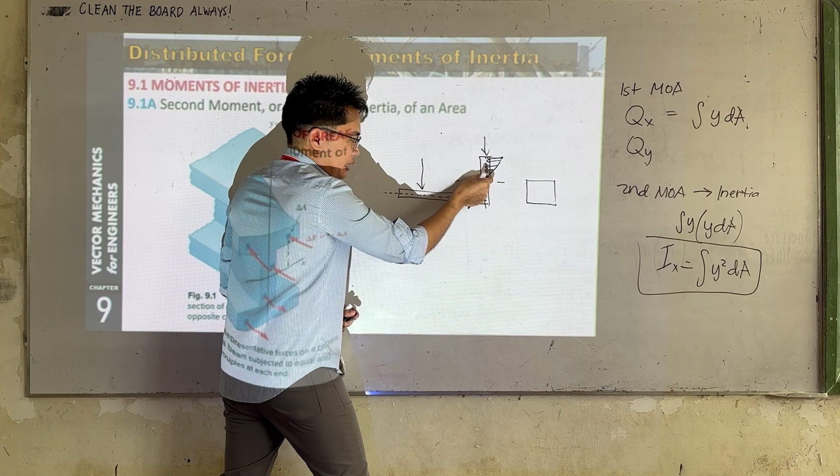Kung titingnan mo dito, kung nakapatumba to, paano natin i-drawing yung compression? Sobrang liit lang, compare dito. Ayan, ito yung amount ng compression na mararamdaman niya.

So the further away our material from the neutral axis, mas better siya. Therefore, kung nakapatayo to, mas better yung design na to, kasi mas nalalakihan pa niya yung amount ng compression na mariresist niya, compare dito, dito ang liit lang.

Kaya sa construction, before, it's a breakthrough nang nalaman nila yung mga I-beams natin. Mapapansin nyo na yung mga metals na ginagamit natin sa construction, in a shape of rectangle ba? Hindi di ba? Kung mapapansin nyo, yung cross-sectional area ng beam natin is in ganitong shape, para siyang tatlong plate - isang plate sa baba, isang plate sa taas, and then may plate sa gitna na nakatayo.

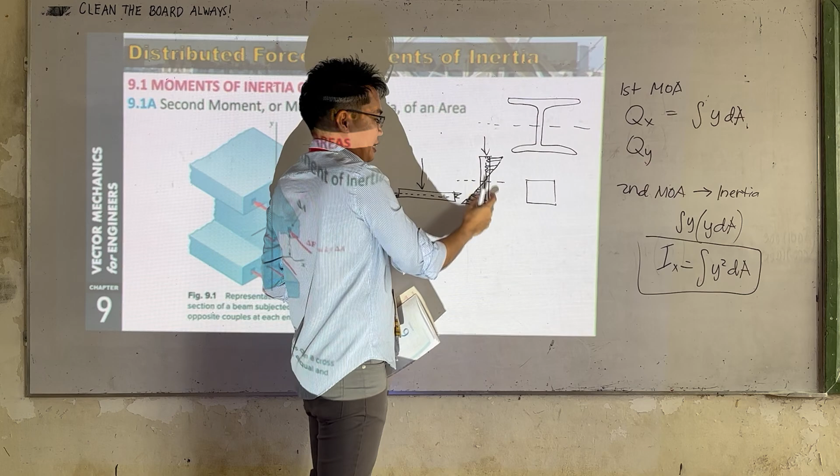Pag ganito, kasi ini-increase niya yung amount ng area that is far from our neutral axis. And by that, increasing the amount of area that is far from neutral axis, ini-increase mo yung strength ng material. Na-discuss din natin, for example, ito.

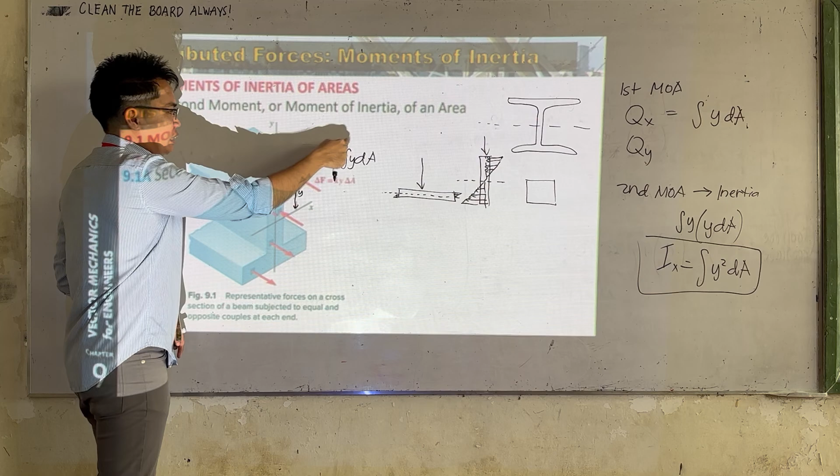Sa pagkuha ng Q natin dito, sabihin natin QX, that is integral of y dA. Yung y natin is just the distance from the point na in-evaluate natin. Ayan, this is our dA, and this is our y. I-multiply mo yung dalawa, i-integrate mo, yan na yung QX natin.

Now kung lalagyan ko to ng squared, i-multiply ko pa to ng another y, magiging Ix na siya. And then kung gusto kong hanapin yung inertia ng whole system ko, i-sum up ko lang lahat ng product ng y squared at saka dA natin.

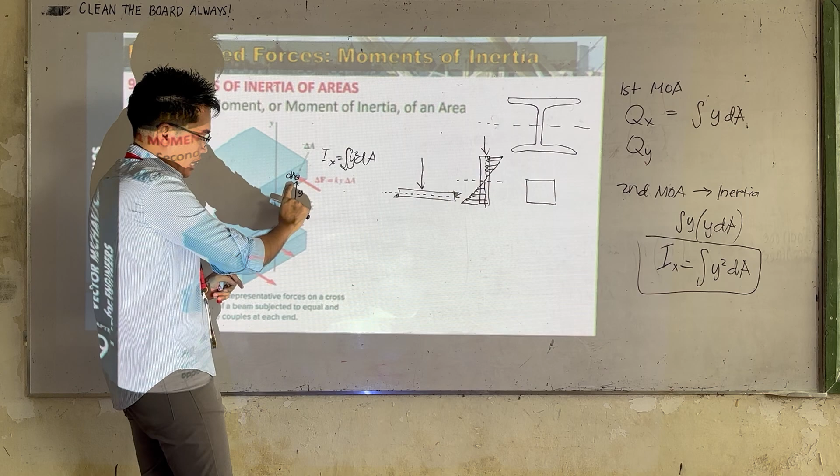So ayan lang, increasing this one, makikita nyo that y is directly proportional to our moment of inertia. Therefore, increasing this y, increasing the distance away from our neutral axis, would increase our second moment of area or the inertia. Makikita nyo from the formula, they are directly proportional - increasing the distance would increase the amount of inertia.

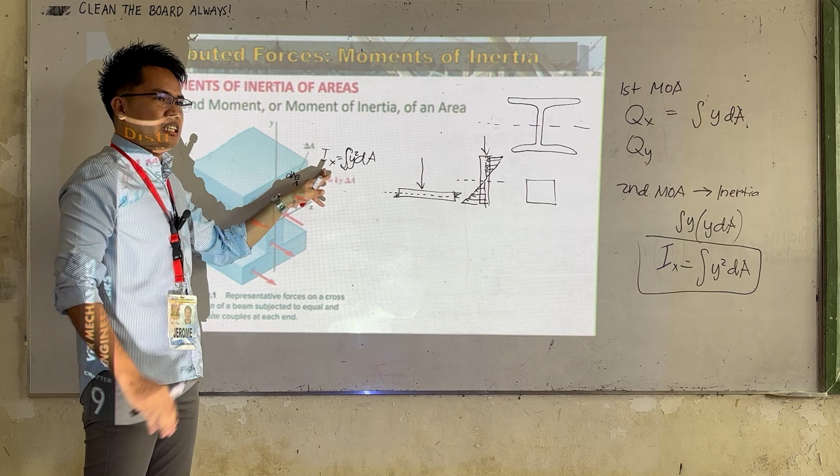Okay, but here, yung inertia natin ay hindi siya independent or hindi siya material property. Sabihin natin, not all the time na yung inertia natin is the same kung the same yung structure at saka yung material property natin. So yung inertia natin is nababago-bago.

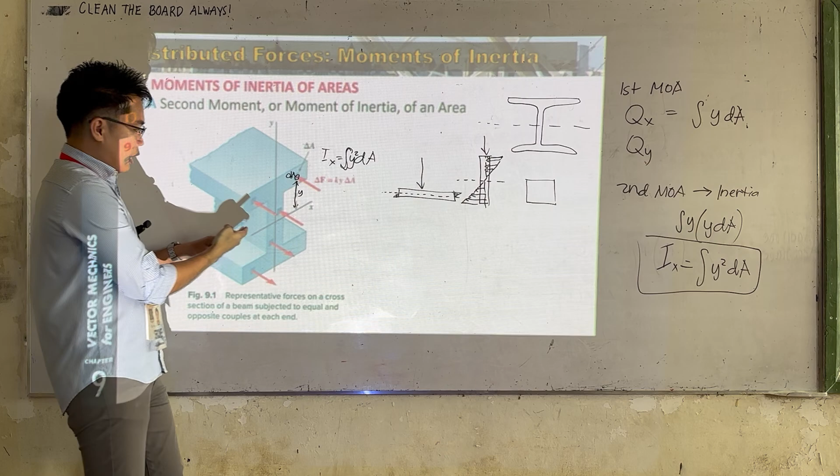Depende kung ano yung axis na ginagamit mo. Kung yung axis mo na ginamit is itong neutral axis, yung distance mo from here to here is y. Now what if yung gamitin kong axis is dito sa bottom? Ang distance from here papunta sa bottom ay mas malaki. So hindi all the time na kahit same yung cross-sectional area natin, and same yung material natin, same na rin yung inertia. Depende pa rin sa axis na gagamitin natin.

Yung mga inertia natin, may integration man to, kaya we need to evaluate this one. Pero sa book natin, available na yung mga na-integrate na mga equation para sa mga regular na mga shapes.

For example, we have circle, we have triangle, or we have parabola. Ito sila ay na-integrate na, pero yung natin, yung neutral axis na pinili natin is at its centroid. So no need na i-evaluate natin to na expression. Kaya available na yung mga formula sa mga regular shape polygons.

All we need to do is to memorize. Pero kung hindi mo to memorize, mag-evaluate ka talaga. Pero sa exam natin, i-allow ko na magdala kayo ng index, para hindi na mag-memorize. And then ano pang meron dito?

Na sir, what if sir yung hinahanap sa exam is yung inertia natin, gusto kong kunin na inertia is yung ginamit kong axis is nandito sa baba. So ano yung gagawin ko?

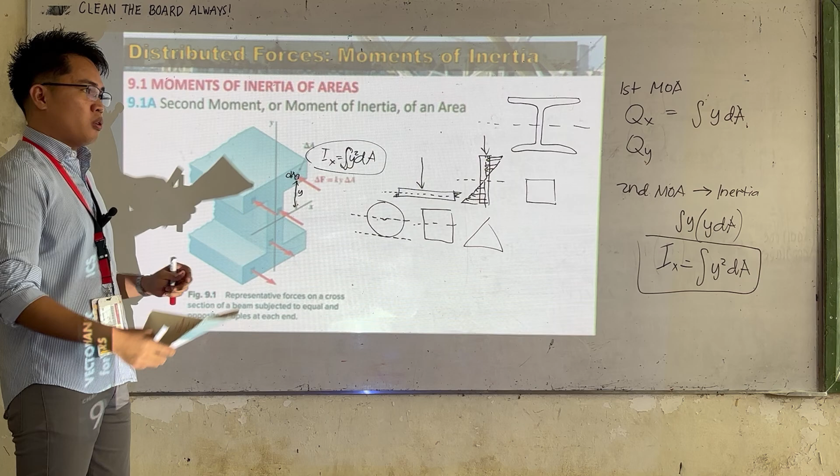Yung available lang sa book or available lang sa index ko is itong nasa centroid ko. So ano yung gagawin ko? Dyan napapasok si parallel axis theorem.

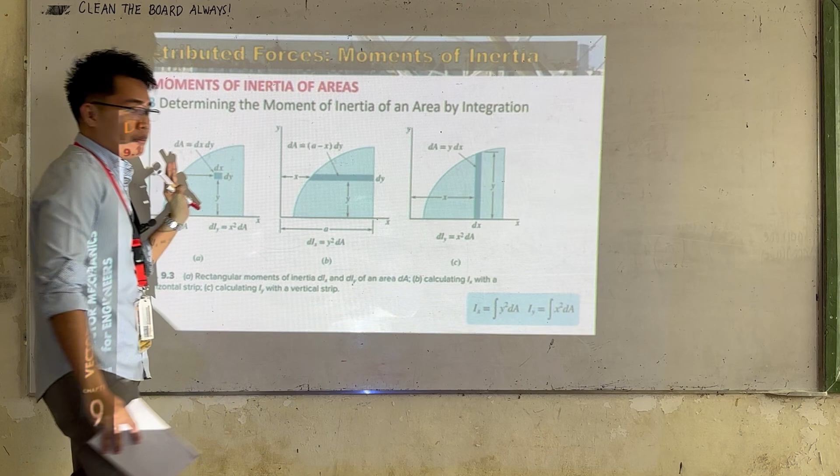Familiar kayo nito? Na-discuss na natin to last time sa chapter 5. But for this one, yung equation natin is YDA pa, wala pang squared. So this time, same pa rin yung gagawin natin, same expression, same figure, pero yung y natin dito meron nang squared. Yung way ng pag-solve natin sa pag-evaluate ng area, nahahanap natin ng area, same pa rin sa chapter 5 natin, sa centroid na topic, sa integration. Pero dito, yung expression lang natin may squared. Parang walang kaibahan, nilagyan lang natin ng squared dito.

So basically, this topic is parang repeated lang. Nilagyan lang natin ng squared dito. Yung additional lang dito is yung pag-integrate natin na may squared. Parang hindi to bago.

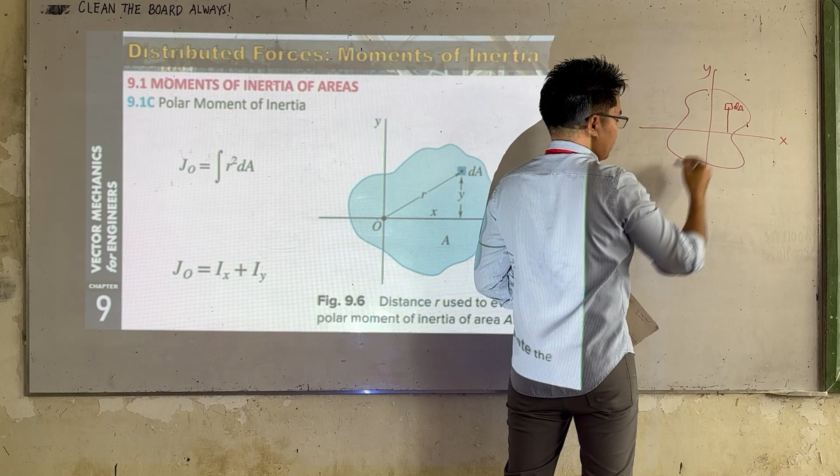If we have an expression, for example, meron tayong area dito, at yung nakuha mo dito ng elemental area dA. Meron tayong x-axis at saka y-axis natin. In order na makuha natin yung Ix, ix means yung y natin, ang moment arm, dito naka-rotate. So ayan lang, ix, therefore, yung ginamit mong moment arm is y.

So this is integral of y squared dA. Kung dito naman sa x yung ginamit mong moment arm, yung makukuha mo si iy, integral of x squared dA. Dito mo makikita, kung yung material mo is mas rigid siya, kung mas malaki yung second moment of area natin or inertia.

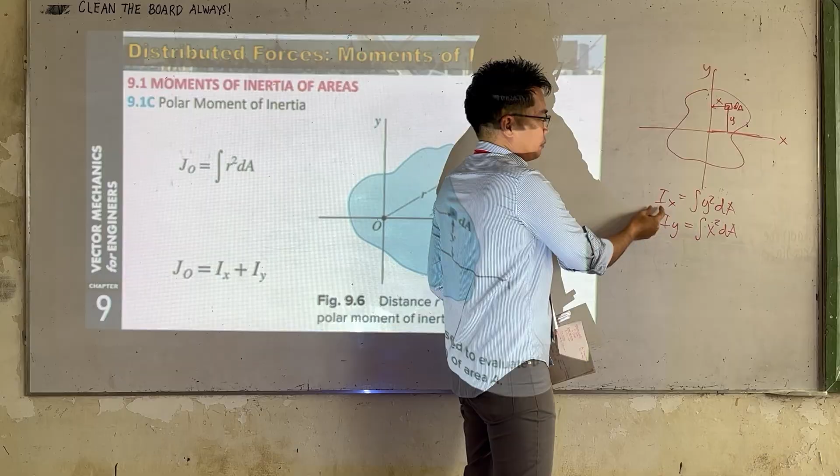So evaluate lang natin to. Actually, dito sa 161, yung gagawin lang natin dito is isolve natin si I. At yung application ng inertia natin, dito na sa ENS 164. Saan ba natin ma-apply si I natin?

So si I is pwede nating i-apply sa tinatawag nating deflection of beams. Di ba sabi natin kanina na mas malaki yung I, ibig sabihin mas resistant siya from bending. So sa ENS 164, yung formula ng deflection natin, we have d squared v over dx squared is equal to m over EI.

Yan yung deflection natin, the amount of moment over the E times the I. Yung I natin is yung inertia, while yung E natin is yung modulus of elasticity natin. Di ba magagamit natin yung I dito? So yung I, mas malaki to, makikita mo na they are inversely proportional sa deflection natin.

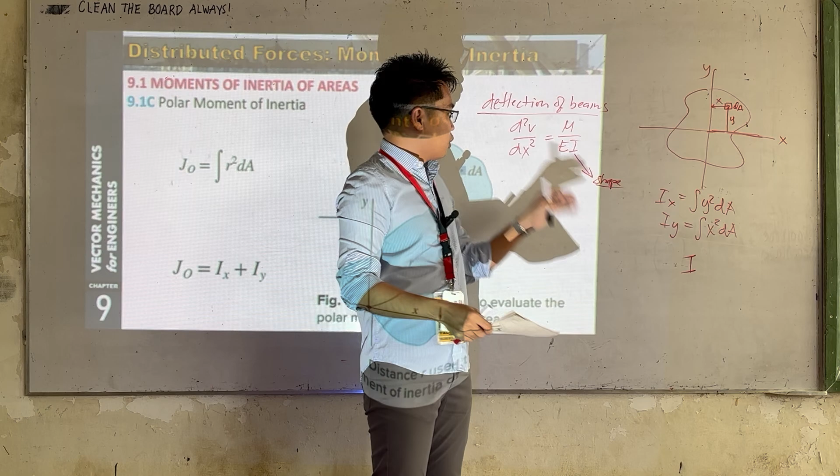Yung I natin is for the shape ng material. Kung pipili ka ng material mo, dalawa yung kailangan i-consider: one is yung material property, and the second is yung shape ng material mo. Kasi yung shape ng material mo nakaganito, mas mabebend siya. So in order na malaman mo yung deflection niya, meron tayong dalawang kailangan. Yung I dito is for the shape, at yung E natin dito, the modulus of elasticity, dito makikita kung ano yung ginamit mong material.

Steel ba? Aluminum ba? So ayan lang, dalawa yung kailangan: klase ng material and then sa shape ng material.

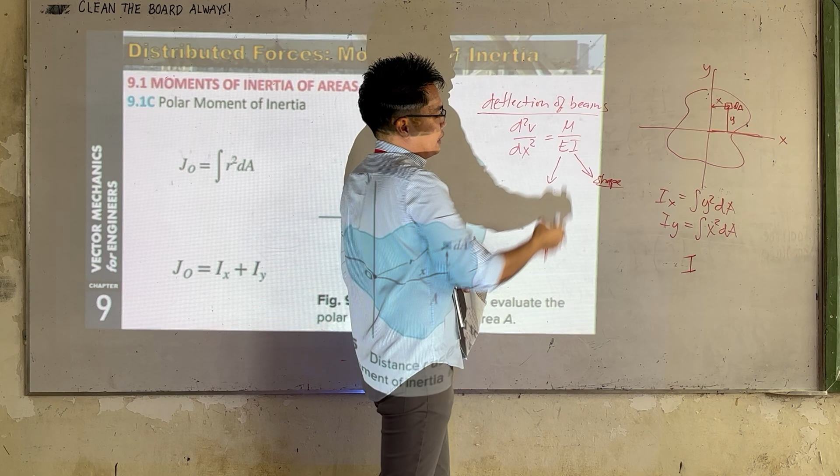Okay, another application nito is yung critical buckling. Dito din, ENS 164 pa rin to. Formula nito is PCR is equal to pi EI over L squared. Makikita niyo na yung I natin dito ay kailangan pa rin hanapin in order na masolve natin yung critical buckling natin, ang load for critical buckling.

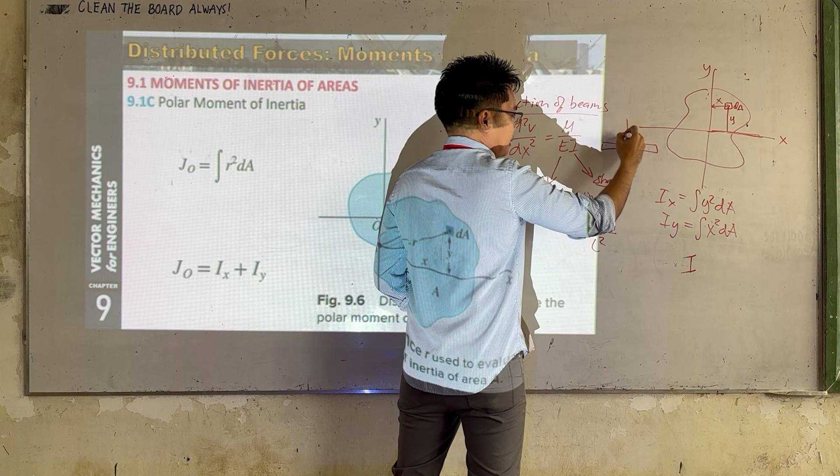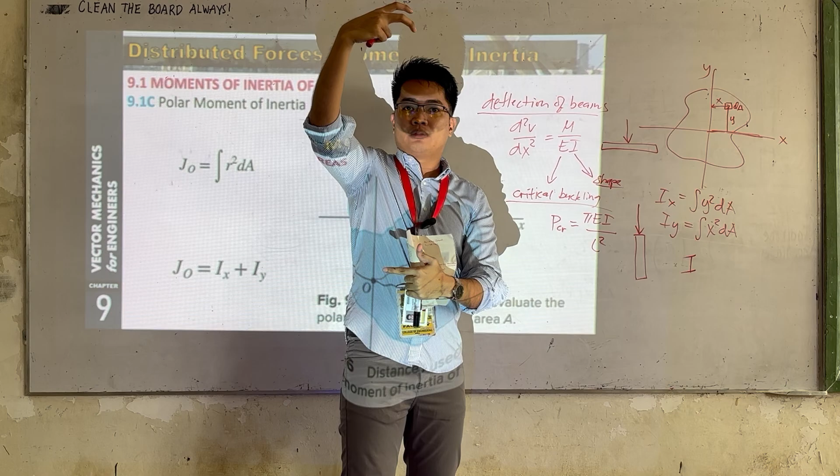Saan ito ma-apply? Kung ito yung beam natin, in-applyan natin ng force na paganyan; dito naman yung critical buckling natin, if we have a column at applyan natin ng force na paganyan. Mababali ba siya? Mabebend ba siya? Maganito ba siya? Ma-imagine niyo? Yung application ng load pag ganito, dito naman, kung yung beam natin gawin natin column, ayan, column.

Yung haligi natin. Importante na master mo magkuha ng inertia, kasi itong pagkuha dito is step 1 lang to para ma-solve yung mga ganito. Okay, so basically easy lang naman to.

So far, yung diniscuss natin is kinuha natin yung inertia with respect sa x-axis and with respect to y-axis. Now, how about z-axis? Anong meron dito sa z-axis?

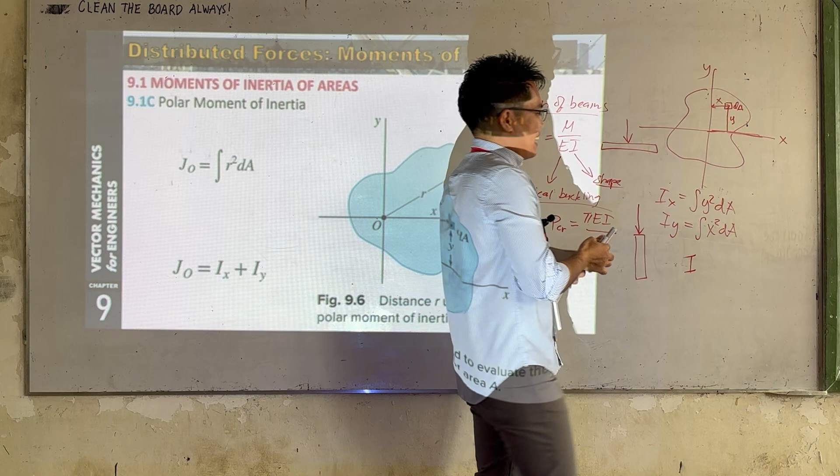So ang z natin, yung inertia natin along this z-axis, ay tinatawag nating polar moment of inertia. Ito ay basically integral of r squared dA. Sa calculus, ano pa yung equation ng circle? R squared is just equal to x squared plus y squared dA.

Ngayon, ano naman yung x squared dA? This is just the Iy. How about this one? This is just the Ix. So the polar moment of inertia is just the sum of Ix and Iy.

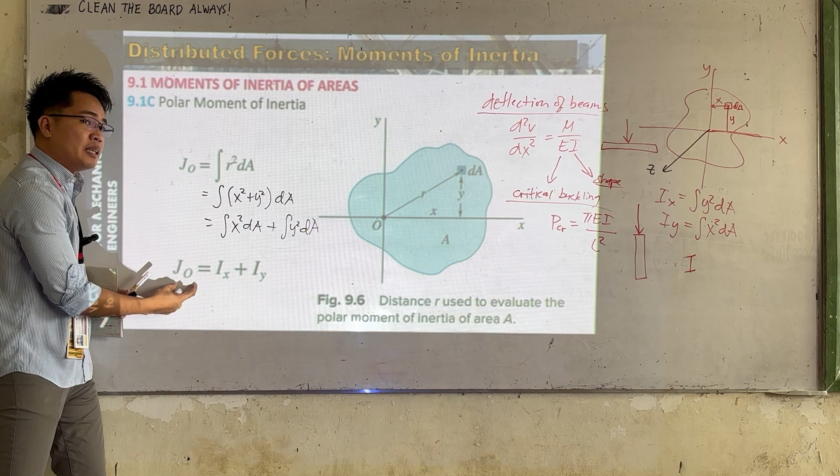Ano naman yung magbibigay ng information kung bakit natin kailangang hanapin ito? Yung angle of twist natin, another application ito sa 164. Angle of twist natin is just TL over JG. So in order makuha yung angle of twist, we need to solve for the J. Ano ba itong angle of twist?

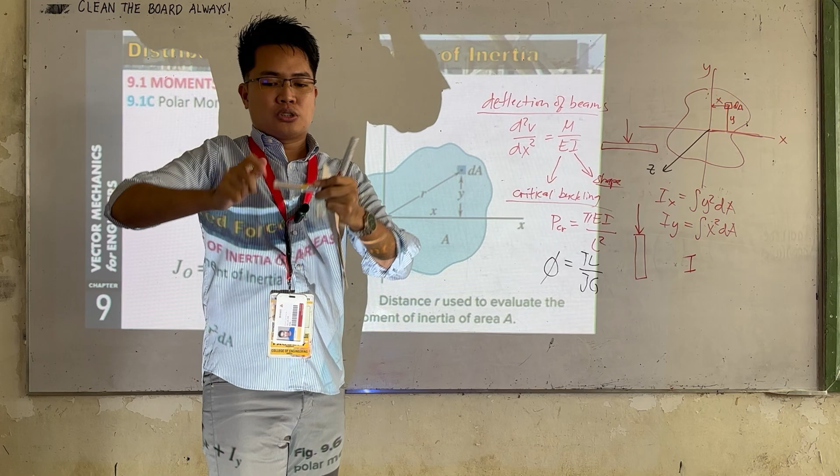Yung material natin, nilagyan natin ng force, meron ding force na pa ganito. What if yung force na nilagay ko is a twisting moment, or yung tinatawag nating torque? Yung pag-twist natin dito, circle man ito, kung lalagyan natin ng twisting, yung axis niya somehow would rotate at an angle. This angle here is what we term as the angle of twist.

And knowing that angle of twist is inversely proportional to our polar moment of inertia, ibig sabihin kung malaki yung polar moment of inertia natin, maliit yung angle of twist. Kung maliit yung angle of twist natin, ibig sabihin yung material natin would somehow resist the twisting motion of the moment applied. Mas malaki yung polar moment of inertia, mas mahirap siyang i-twist. So we have the inertia along X, inertia along Y, and inertia along Z, which is also called the polar moment of inertia, which is just the sum of Ix and Iy.

Ngayon, another application ng Ix natin ay yung tinatawag nating radius of gyration. Basically, ito lang yung concept nito: if we have an area, papalitan mo ng isang area lang na manipis, kung ito sa papalitan mo ng area na thin strip, wherein the same yung I nila. Ito lang yung formula ng radius of gyration. Yung area dito, palitan mo ng thin strip na wherein the same sila ng I.

For example, we have different area. Ito yung area natin, and then we have another area. Ngayon, kung ito siya ay papalitan ko ng thin strip, yung makukuha kong thin strip ay nandito sa taas. Mas malayo yung distance nila compared dito, mas malayo compared dito. Ibig sabihin yung material natin mas better ito. So equation, substitution lang ito.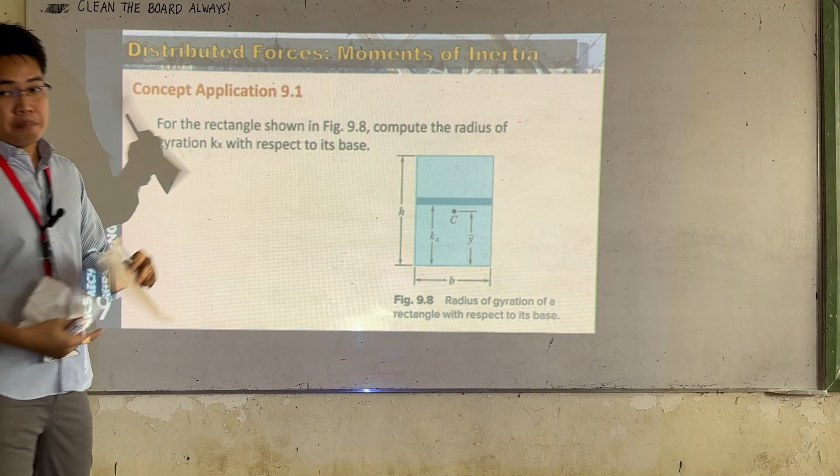Sige, let's have an example para mas maintindihan. Ito naman yung importante: for the rectangle shown, compute the radius of gyration kx with respect to its base. Sulat lang natin. Ano yung formula? Yung radius of gyration natin, we have square root of Ix over A.

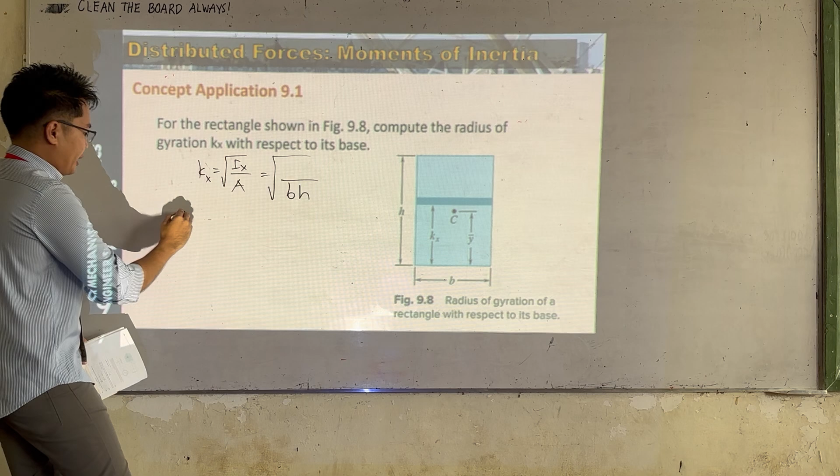This is equal to, ano yung area nito? This is just base times height, b times h. How about yung Ix natin? Ano yung formula ng Ix? We have integral of y squared dA. Ano yung dA natin? dA natin is the elemental area of our strip.

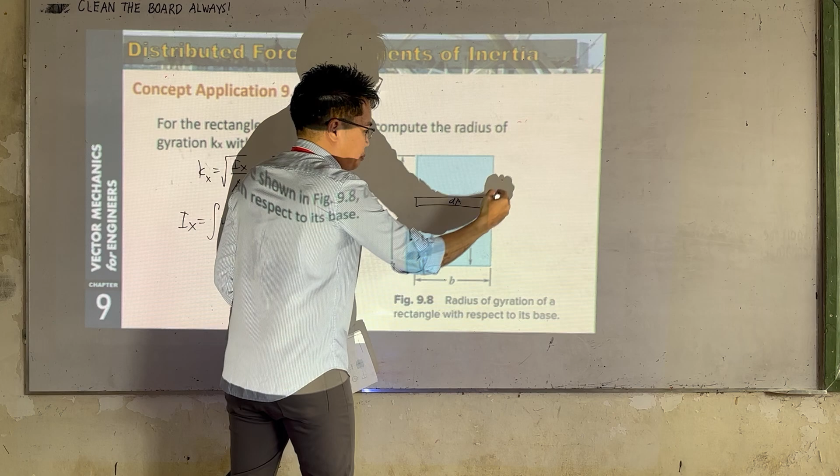Kung ito yung strip natin, this is the dA. Ano yung shape niya? Rectangle. Ano yung formula ng area? We have base, ano yung base niya? Base niya is B. Ano naman yung height niya? It's dy, maliit lang, elemental.

Substitute lang natin dito: integral of B times y squared, yung area natin. Wait lang, this is just y squared times, ano yung dA? We have B times dy. So this is just B integral of y squared dy, evaluated from, since nasa y tayo, that is from 0 to h. Evaluate natin ito, this is just B times y cubed over 3 from 0 to h, which is just 1/3 bh cubed.

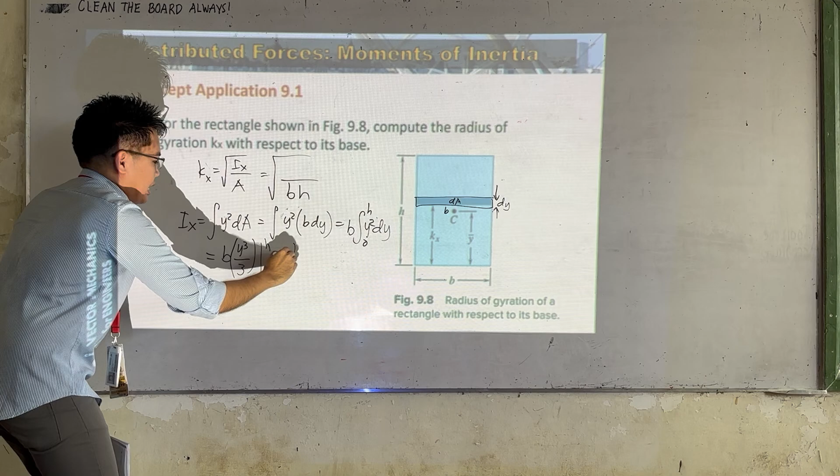Substitute natin dito, we have 1/3 bh cubed over bh. Cancel yung b, cancel ito, magiging squared to. So this becomes square root of 1/3 h squared.

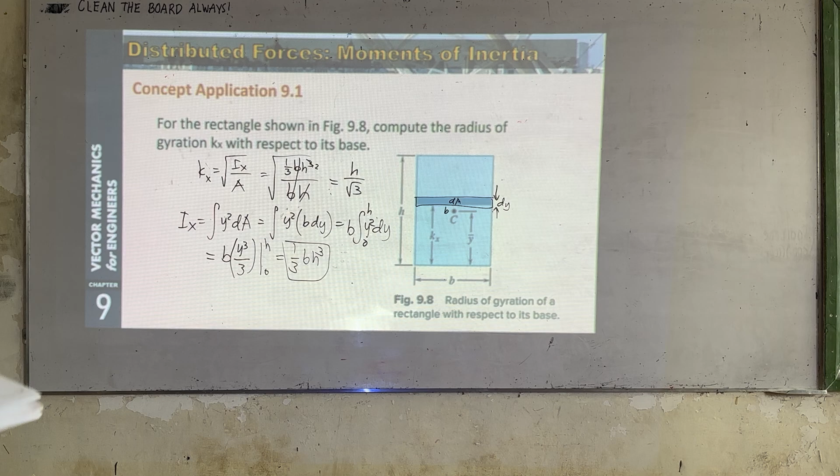Di, napalabas. So, this is just equal to h over square root of 3. Okay, that's easy since it's just a rectangle.

Another example, we have this one. So what does it say here? Determine the moment of inertia of a triangle with respect to its base. So what is the base of the triangle? It's this one. So what are we looking for?

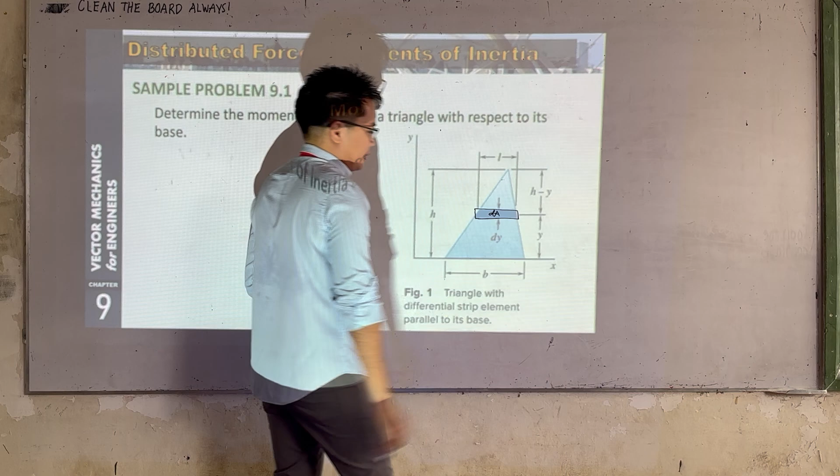IX, IY? IX, right? So if this is a very, very small rectangular strip, somehow its shape is like a rectangle too. So this is our dA. How about the height? This is dy. And then how about the base? It's not dx, right? Let's just call it L. So here is L. Let's evaluate this.

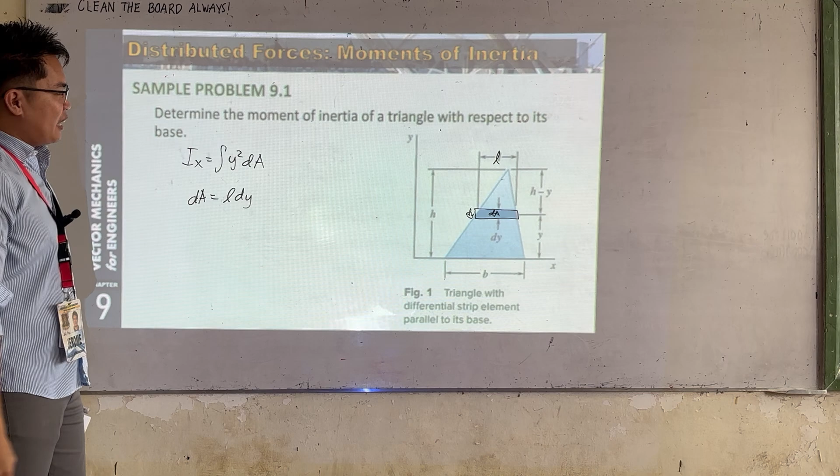What's the formula? IX is just the integral of y squared dA. So we need to know what y is, and dA first. What is dA? dA is just L dy. But our L is somehow not constant. It changes when we change our strip. So therefore, this should be expressed in terms of y. Since it changes, it's not constant. The only constants here are b and h. So we need to transform L in terms of y, h, and b. So what is our L? Think about it. How do we transform L to be in terms of y?

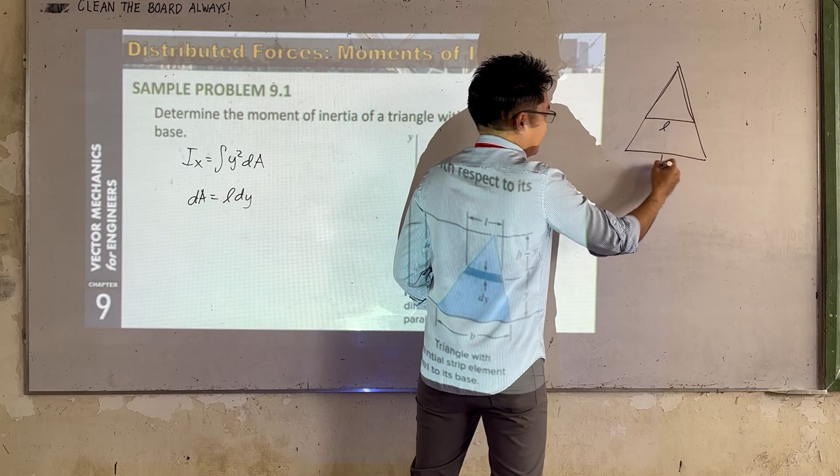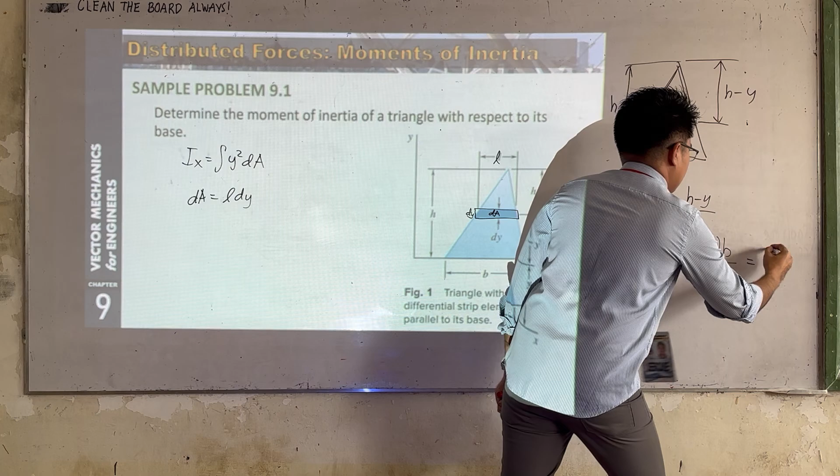What relationships can we see here? We can use similar triangles. If we draw the triangle, this smaller triangle is similar to this larger triangle. This small triangle's base is L. The big triangle's base is B. Its height is H, and the height of the small triangle is H minus Y. Why Y? Because the distance from the base to this point is Y. So, by similar triangles, L over B equals this over H. So, therefore, L is just H minus Y times B over H. Let's simplify this. This is just B minus B over H, Y.

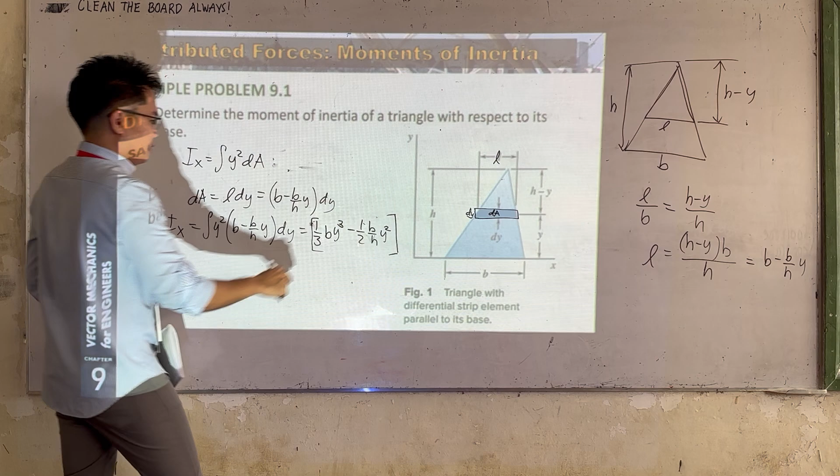So this is B minus B over H, Y, times dy. Let's substitute this in. We have Ix equals the integral of y squared times B minus B over H, Y dy. Let's integrate this. We have 1/3 B Y cubed. And then how about this one? This is negative 1/2 B over H, Y squared... wait, there's a squared here too. This is 1/4, Y to the 4th, and this doesn't distribute. This is from 0 to H.

So let's solve this. We have 1/3 BH cubed minus 1/4. Cancel one H, it's still BH cubed. So 1/3 minus 1/4 equals... what is it? 1 over 12. So 1 over 12 BH cubed. That's it, right? Easy, right?

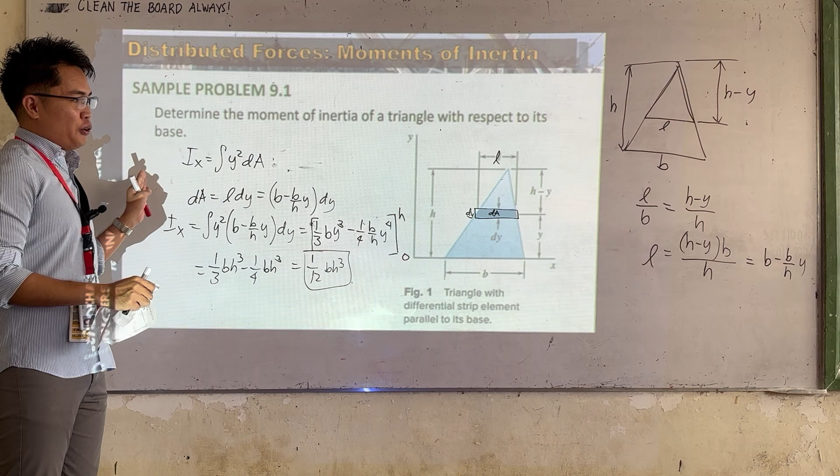This is just like calculus, just integration. The only ENS 161 part here is substituting into the formula, and the rest is just calculus. Any questions? None? Let's proceed to the next example.

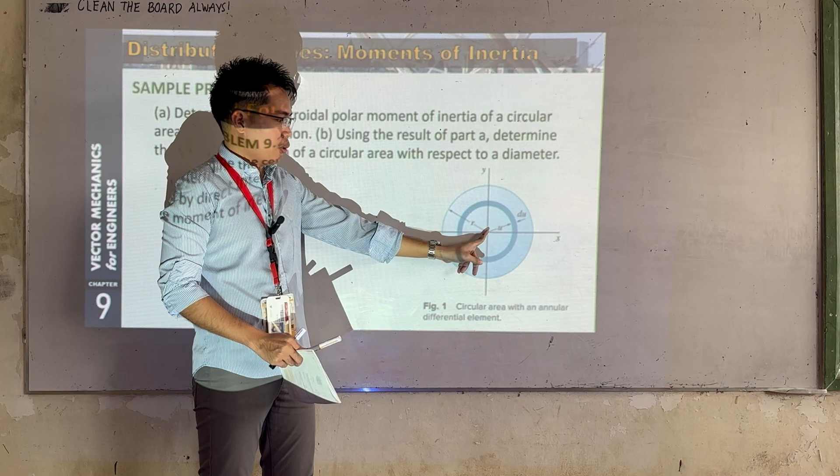Okay, here it is. Determine the centroidal polar moment of inertia of a circular area by direct integration. Using the result of part A, determine the moment of inertia of a circular area with respect to a diameter. So here, there are two things to find. The first is to determine the centroidal polar moment of inertia of a circular area. If we say centroidal polar moment of inertia, that means it's at the centroid. What is our moment of inertia at the centroid, if centroidal?

So, what's our formula? We have J equals the integral of R squared. But what's used here is in terms of U. So let's just call it U.

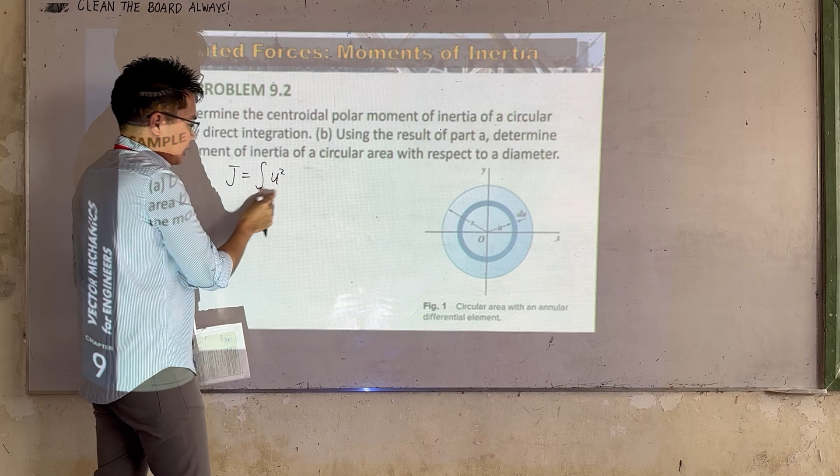Kasi yung R natin dito is an exact value, no? Itong integration natin dito, itong U natin is hindi exact, at any arbitrary distance from our centroid. So this is U squared dA.

Ano yung kailangan natin dito? We need to know dA para ma-substitute natin sa formula natin. So ano yung dA natin? Yung kinuha natin dito since polar, kung Cartesian tayo, we have rectangular. Since ito polar, yung magiging shape ng strip natin is circular, no? So ito yung strip natin.

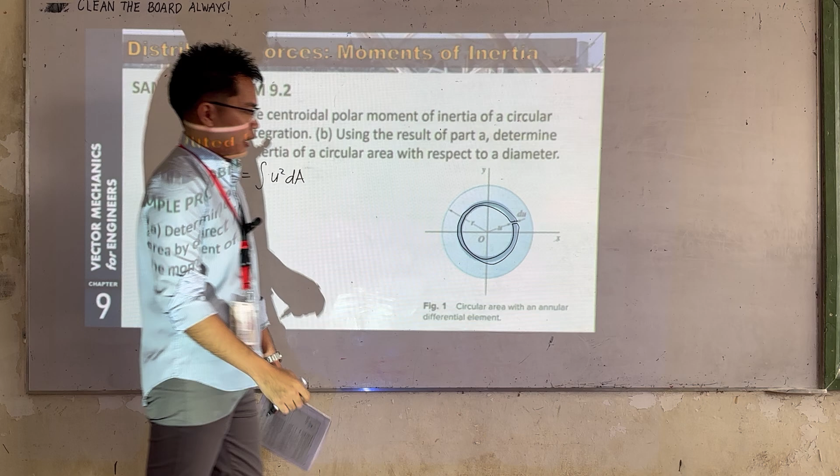Paano natin makukuha yung area nito? Sa palagay nyo, paano natin kunin yung area nito? Sige, all we need to do is putulin natin yan, at i-straight natin. Ano na yung area niya? That is in a shape of a rectangle.

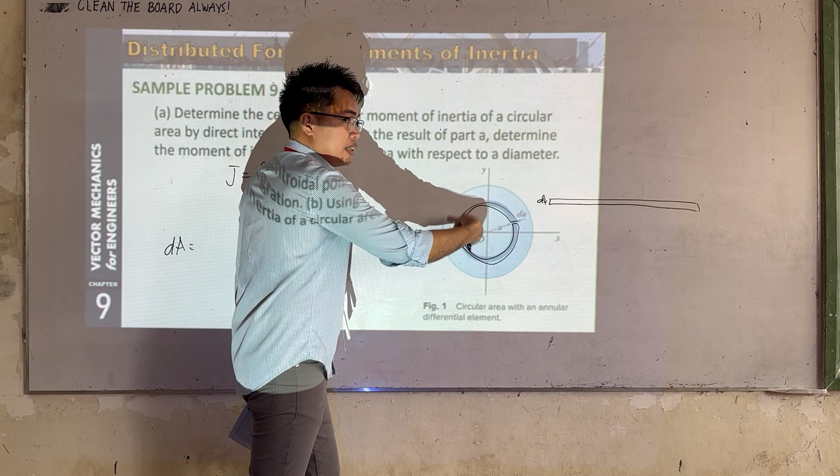Ano naman yung height ng rectangle natin? We have du. Ano naman yung length ng rectangle natin? That is just the circumference. Ano yung circumference ng circle? We have 2 pi, in this case this is u. So 2 pi u. Therefore, yung dA natin is just base times height.

Yung base natin is 2 pi u times the height na du. So substitute lang natin dito, we have integral of u squared times 2 pi u du. So this is just 2 pi integral of u to the 3 du, evaluated from 0 to r.

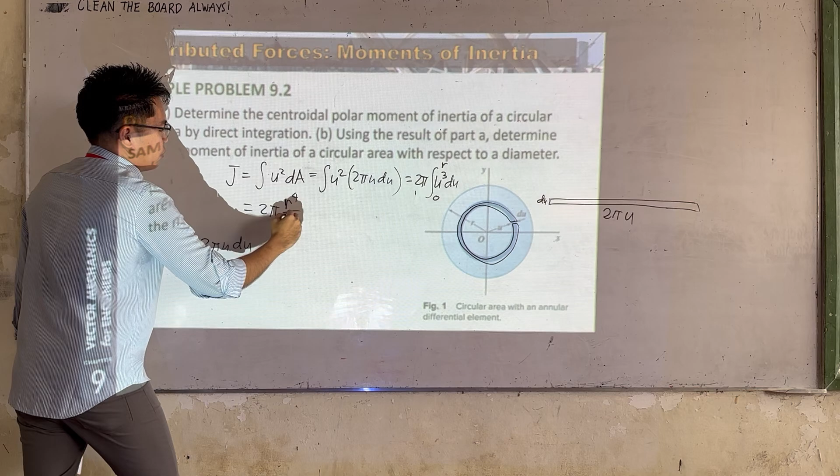So dito, we have 2 pi r to the 4 over 4. Tama? Ayan lang, o simply simplify natin. We have 1/2 pi r to the 4. Ayan lang, no? This is our letter A, the centroidal polar moment of inertia.

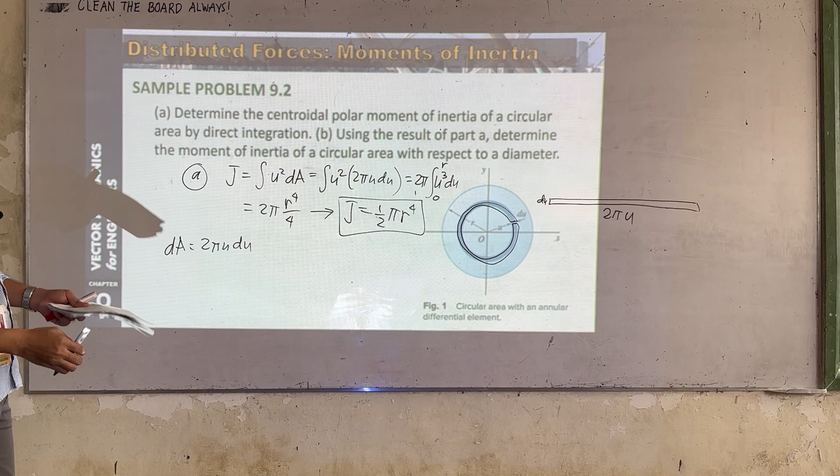How about sa letter B? Anong sinabi dito? Using the result of part A, determine the moment of inertia of a circular area with respect to its diameter, ibig sabihin sa x at saka sa y natin. Sabi dito, using the centroidal polar moment of inertia. So ano yung formula natin? J is just Ix plus Iy.

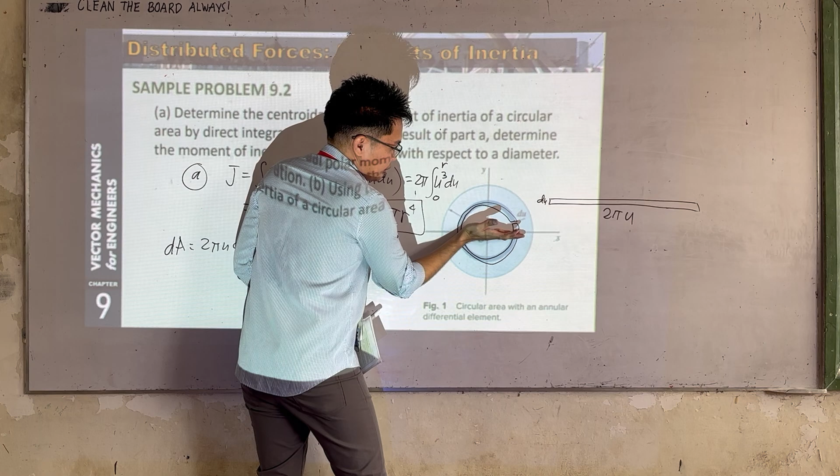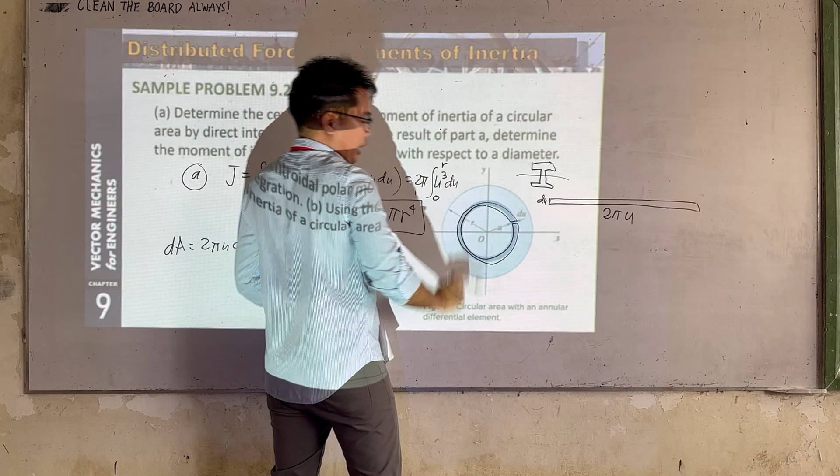Ito yung mga hinahanap natin dito. Yung Ix natin, ano yung in-evaluate natin dito? Circle, no? Kung ito din, kunin natin to, circle pa rin. Somehow, yung Ix natin at saka yung Iy natin, the same sila. Hindi naman na-change, for example, yung sa I natin dito, yung Ix niya is not the same with Iy. Pero dito, since circular to, yung Ix natin the same sa Iy, so basically pwede natin tong gawin as 2Ix.

Ano yung polar moment natin? We have 1/2 pi r to the 4 is equal to 2Ix. So therefore, yung Ix natin dito is 1/4 pi r to the 4. Ayan lang, any questions?

Wala, proceed tayo. We have another example here. Ito, balik naman yung example, sa centroid, parabola natin. I-repeat lang natin dito.

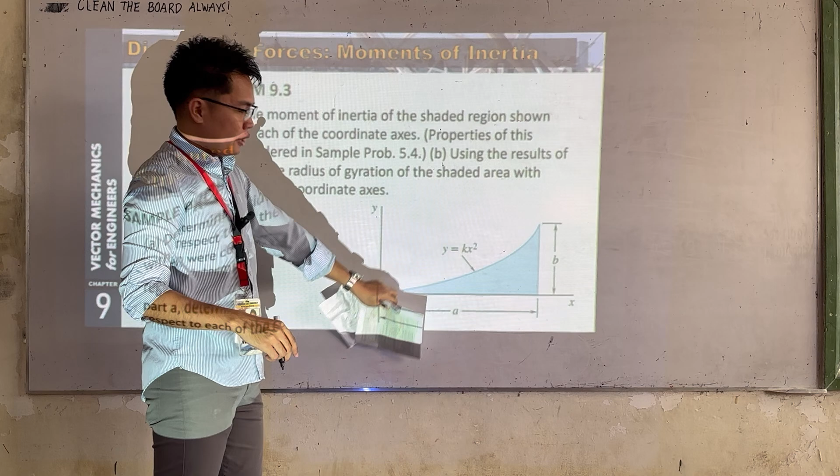Kung maalala nyo, itong problem na to, di ba, yung Qx natin is just equal to integral of y dA. Since Ix na yung hinahanap natin dito, this becomes y squared dA. Ito siya, na-solve na natin to sa centroid, itong problem na to. So mag-integrate na naman tayo ng naka-squared lang, so walang bago dito, na-squared lang. Sige, yan, solve natin to.

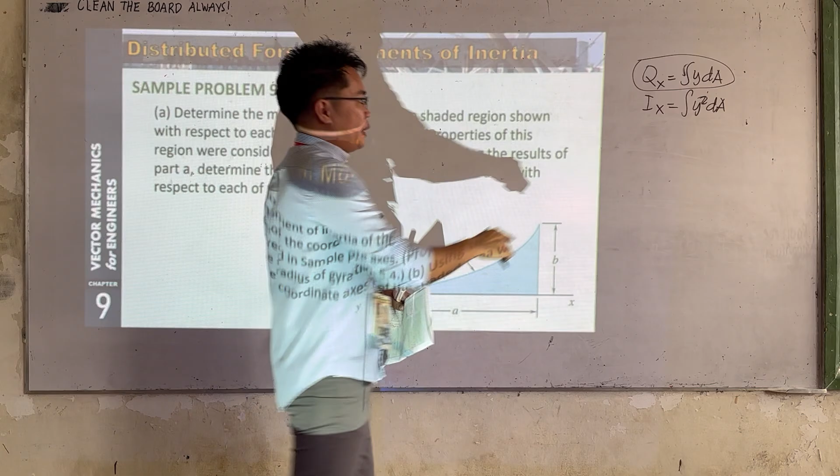Ano yung Ix? We have integral of y squared dA. So we need to know ano yung dA natin. Since sa base tayo nagbase, ano yung shape ng elemental strip natin? Pag ganito, kasi yung moment arm natin is itong y.

Okay, sige, kunin natin yung Ix at saka Iy. Start na lang muna tayo sa Iy, para mas madaling intindihin. Kung Iy tayo, the formula is integral of x squared dA. Ano yung dA natin dito? dA natin dito is pag ganito na, kasi yung moment arm natin is itong x. Ano yung value na to?

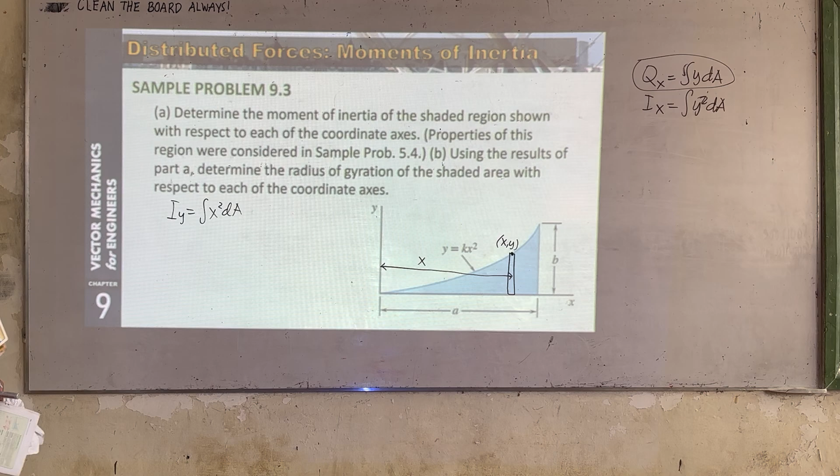This point here, this point is point xy. Tama? Ayan lang, sige, kunin natin yung dA. Ano yung dA natin? dA is just, ano yung shape natin ng dA dito? Rectangle. So ano yung base natin? Okay, dx. Ano naman yung height natin? Okay, this is y, yung height niya y.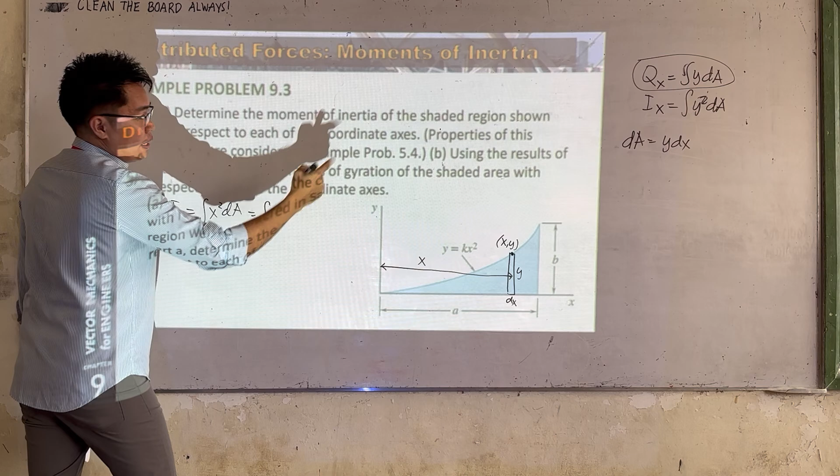So ayan, so therefore yung dA natin is just y dx. So substitute natin dito, integral of x squared times y dx. Now sir, hindi to ma-integrate kasi meron tayong y. So we need to find the relationship of y in terms of x para integrable na siya, para ma-integrate.

Ano yung relationship ng y natin? Okay, we have y is equal to k x squared. Yung k natin dito is constant, so dapat i-in terms natin sa mga exact values natin. Yung k natin dito is a constant, so dapat i-in terms natin ito sa exact values. Ano yung mga exact values dito? We have a and b.

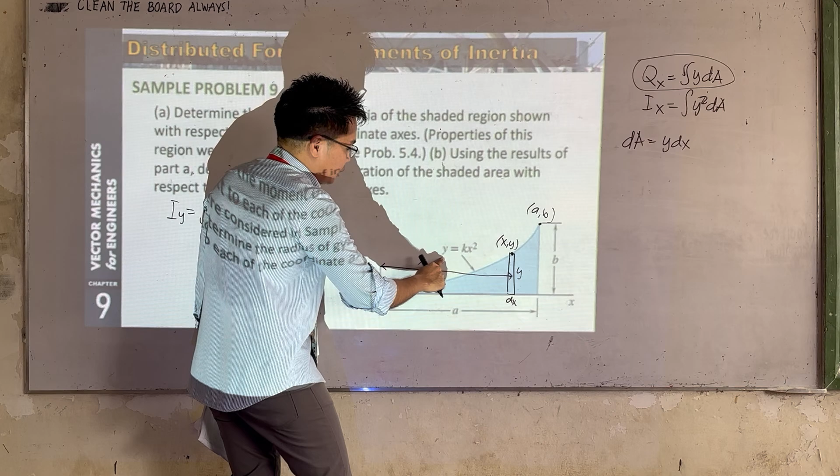So if y is this point, ano yung point na to? We have a, b - point a, b. So if x is a, y is b. Substitute natin dito: if x is a, y is b. Therefore, k is just b over a squared.

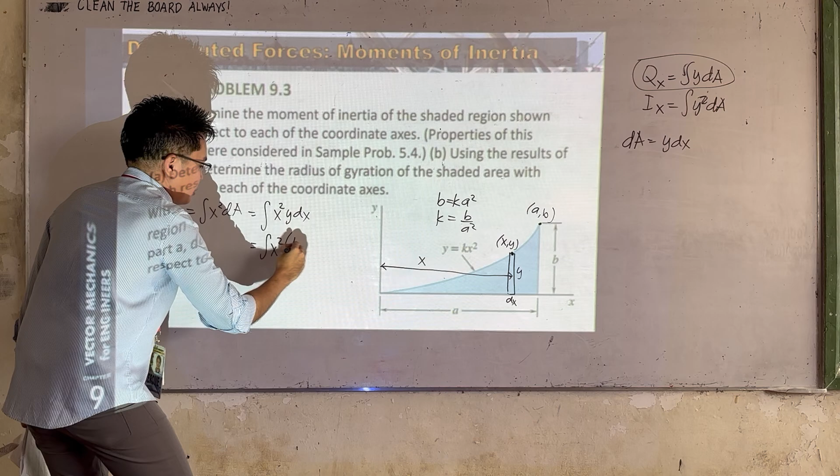So ayan lang, therefore ito pwede natin itong isolve, x squared. Ano yung y natin? Y is just k times x squared. So ano yung k? We have b over a squared times x squared dx.

So ano yung evaluation natin dito? Limits from 0 to a, kasi along x tayo, x, so from 0 to a. Sige, solve natin to. We have b over a squared times x to the 5 over 5, evaluated from 0 to a. So this becomes... ano yung a natin? A to the 5, we have a to the 3 times b, then over 5. So this is our IY.

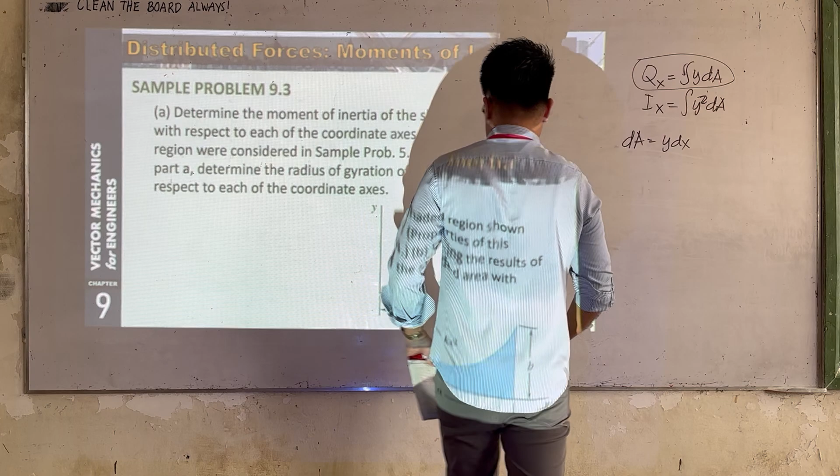Klaro? How about kung hinahanap si IX? IX naman tayo. Erase natin to. So kung hinahanap si IX, maglalagay tayo dito ng horizontal rectangular strip. Ano yung formula ng IX? Integral of y squared dA.

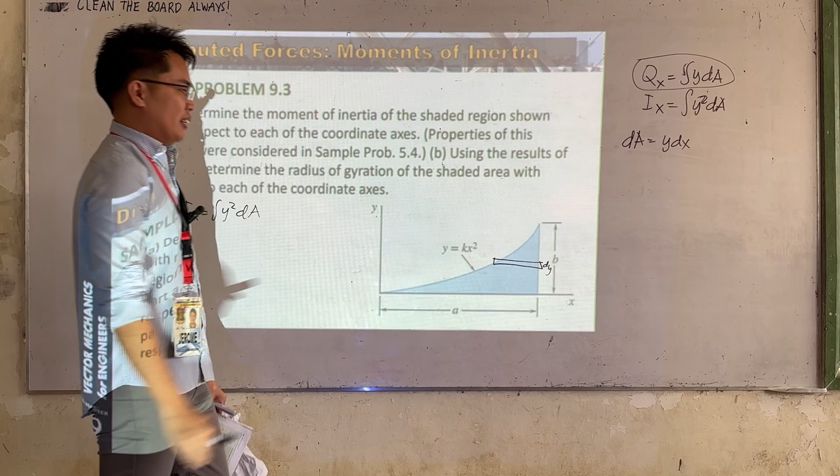Now yung dA natin, ano na yung formula? So we have, yung height niya is dy. Ano naman yung base niya? This point here, ano yung point na to? This point is x, y. So ano yung value nito?

So if the distance here is x, so this distance here is a minus x. The whole distance is a minus x, we have a minus x. So therefore, yung dA natin dito is just equal to a minus x dy.

So substitute natin dito: integral of y squared times a minus x dy. So hindi pa natin ito ma-integrate, dapat in terms natin sa y. So ano yung value ni x natin dito? Na-erase, ano pa yung formula? Wait lang ha, solve na lang natin balik.

Yung y natin, b is equal to k a squared. So yung k natin dito is b over a squared. So yung x natin dito, x squared is equal to y over k. So yung x natin dito is positive negative square root of y over k.

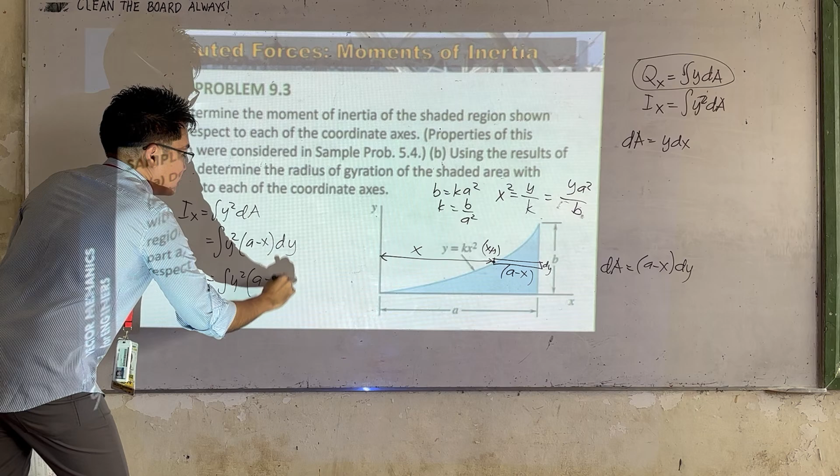Then substitute pa ito. Naghanap niyo eh, sobrang taas nito. IY na lang hanapin. Sige, y over b, a squared over b. So this becomes integral of y squared, a minus the x is square root of a, square root of y over b, dy.

Simplify lang natin to. Wala ba yung mali sa substitution? Tama lang, sige, simplify natin to. We have a y squared minus b natin, a over square root of b na lang, y to the 3 over 2.

Evaluated from 0 to b. So this becomes 1/3 a b cubed minus 2 over 7 a over square root of b, b to the 1/2 na lang, 1/2 so magiging ab to the 5/2.

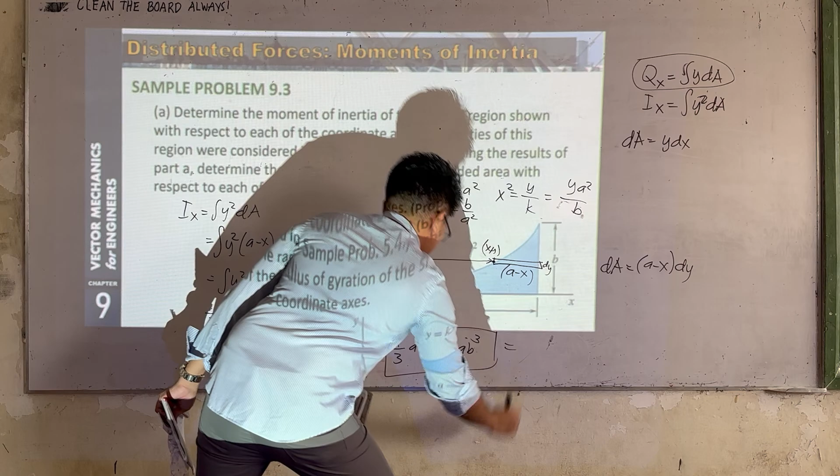Okay? Ay wait lang, 6 pala, minus 1, 6 so magiging 3 to. Ah pwede pa ni ma-minus, sorry. Ilan ni siya? 1/3 minus 2 over 7, 1 over 20... 21, no? 1 over 21. So ito yung final answer natin.

Kung nandugay ka mag-integrate, kayo sa'yo mabaylo ni mo ang derivative of integration. Sige, so do you have any questions here?

Proceed tayo sa parallel axis theorem. Ayan lang, basically ito lang yung formula. Yung mahirap na part dito is yung pag-analyze dito na part.